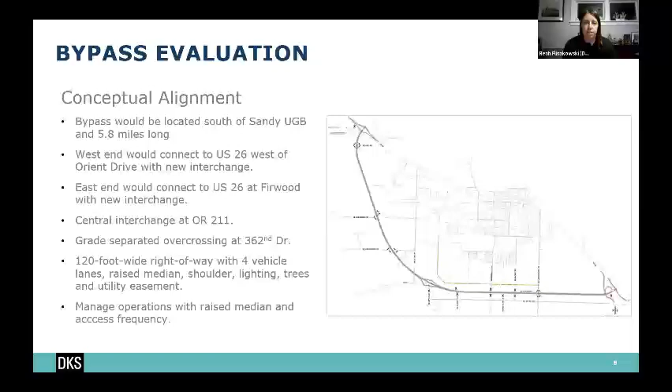And then depending on the spacing, some other roads that would be crossed or overcrossed by the bypass, we would have to close the connections and make sure we have local streets to handle connectivity, so they could get to other facilities that either get you back into town or to some of the right in, right out connections. We'll have the bypass.

Question from the mayor: as a clarification, it sounds like the 362nd will not be able to connect to it. Right now, we're thinking no, it's too close to the 211 overpass, but it would have an overcrossing and could connect to 211, which would bring you back to the interchange. So in a roundabout way, you could get to it pretty easily with 362nd, but it wouldn't have direct access to the bypass.

This is Carl. I see a number of things here, and I realize this is still big picture with lots to be decided, but it looks like there was a philosophy that there wouldn't be very many crossings of the new highway bypass. Is that on purpose? And I noticed everything is going to be right turn onlys, which is a different strategy than currently exists with Highway 26. Is that a new strategy?

Well, the interchanges on each end and in the middle would be full access. I wouldn't say it's a different strategy, but for this type of facility it's recommended to have a raised median to preserve capacity and make sure we're getting the throughput and traffic flow needed. Every time you add a full access intersection, you can significantly degrade operations. We'd have to put traffic signals along the facility if it's not an interchange, because of the volumes.

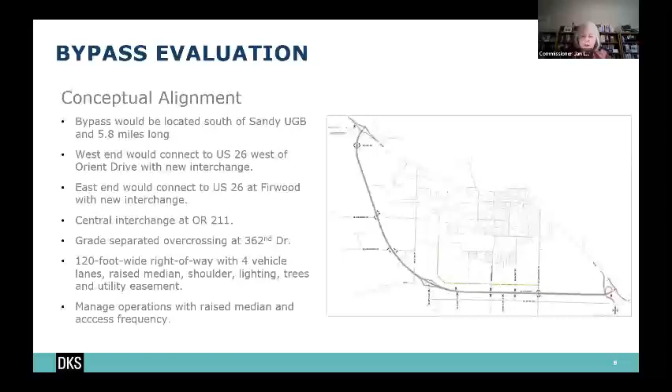All right, let's continue on. Anything else? All right, let me keep going.

So in conjunction with putting together the alignment that I showed, we also took a look at some transportation operations. This is consistent with all of the forecasting and growth, demand, and future volumes we're putting together for the TSP, so they're very consistent. But for the bypass, we are looking at year 2040, and a future peak year that's been adjusted to represent either a summer or winter peak. I know you guys know better than anyone that you have a lot of seasonal fluctuation in your traffic volume demand, especially on the highway.

So we looked at 3 different scenarios in the future. The first was the 2040 no-build. That includes all of the existing transportation system, and if there are any projects we know are fully funded today, that we're very comfortable assuming would be complete by 2040. The 362nd and Bell connection is one of those that's under design now, and we know there's funding in place for that.

Then we jumped to the next scenario, alternative 1. That's again year 2040, but adding any sort of local connection or intersection capacity projects that have been identified, consistent with what's in the 2011 TSP right now. That allows us to compare alternative 1 to the no-build to see what type of improvements we get in intersection performance by building everything reasonable, just short of the bypass. Then alternative 3 is again that 2040 future peak hour, taking all those local improvements in alternative 1 and just adding the bypass. That gives us alternatives to compare, so we can see what type of performance improvements we're seeing just from adding the bypass.

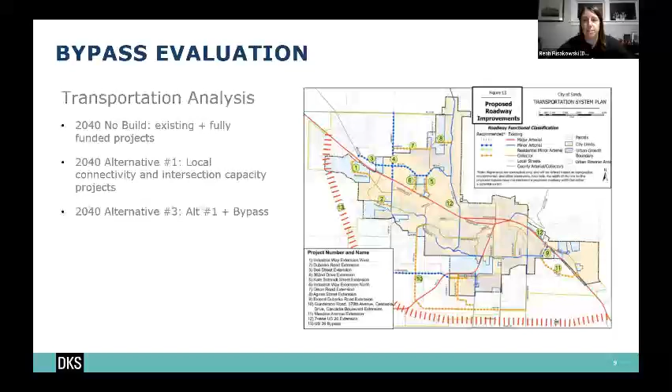That's alternative 1. And then alternative 3 is all of that plus the bypass, and you'll go back to your thing. Yep sure. Okay, so adding the bypass to the other alternative 1 projects, that's alternative 3, right? It is alternative 3, yes. We were just trying to be clear that people knew we were adding the bypass. So basically doing the bypass would give you 4 minutes and 30 seconds savings for people eastbound.

For people that stay on 26, yeah. On the bypass or going eastbound? That would be going eastbound on the existing 26 highway. So you're telling me that going east there's no savings at all, and going west there's only a 4 minute difference? No, it's the opposite, but at least that's what our modeling showed. Again, this is peak hour, but it was a 4.5 minute savings eastbound, and we didn't find any savings westbound.

And this doesn't account for things like traffic problems - we had a truck almost roll over and had a big leak here a few years back, and it stopped traffic for hours. So it doesn't account for any sort of event. It would just be for year 2040, and I did say it's adjusted for seasonal fluctuation, winter or summer conditions, but it wouldn't be related to an event day or something where things are not typical.

But Reah, I guess where I'm confused is that it fails westbound on 26 every Sunday today, and so I have a hard time understanding that people wouldn't take an alternative route. Oh, I'm not saying people aren't taking an alternative route, but when we looked at the travel times between the two, we are finding that people are taking the bypass. About 1,500 cars an hour would divert over to the bypass, and then 2,300 cars would choose to stay on US 26.

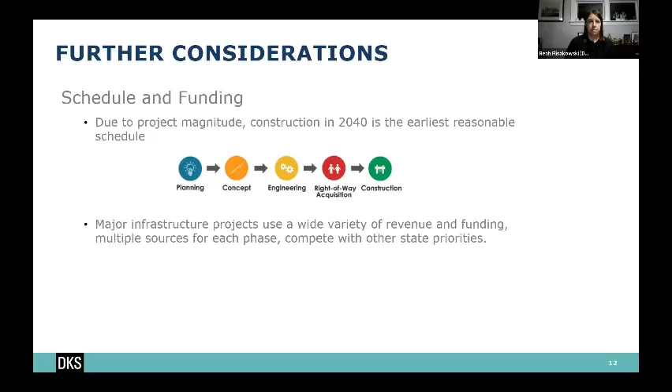The only other thing I was going to say is that I think it would be helpful, no decisions tonight obviously, but for staff to know how budgetarily we would start going down a path as far as the bypass, because I understand your concerns about being like a split in funding, a lot of it coming from the state or feds. But to even do things like the white paper request from Kathleen, which I think was a fantastic idea, we still need a funding source for that. I don't know who would be paying whom. I don't know if DKS would be drawing that up for us and how that would be paid for. But there are going to be costs associated if we want to start taking steps towards this eventual goal. So just trying to get an idea on that. Thank you.

All right, Reah, do you have some more wrapping up to do? No, if you guys are happy, I'm happy. That was a very good discussion. I think we're happy. Thank you so much for the presentation.

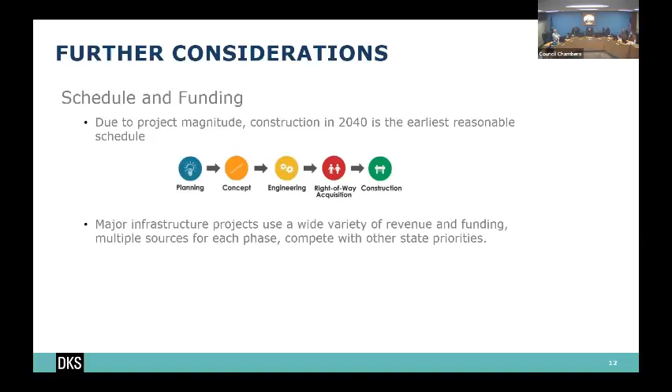So we have a community advisory committee that we're working with. We will have a public open house next year. And then as I had mentioned, we'll also have public hearings.

So with that, I believe we asked 9 questions on the online survey and we had over 400 responses, which I think is amazing. This might be one of the few good things that came out of our pandemic, it's really pushed us to have online public involvement. In the past, if we did it the old fashioned way with an in-person open house, maps out, asking questions, I think we'd be lucky if 40 people came. I've been to open houses where 0 people came. So getting over 400 responses and having this type of input, I think is great.

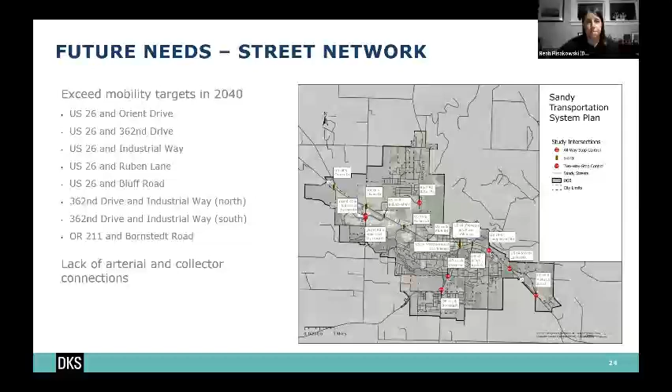Right, any other questions? All right, I will keep going.

So I'm just focused on the street network. This figure shows all the projects, the highs, mediums, and lows, but for space on my slide, I just grabbed the high priority projects. Again, these are all early prioritizations that are up for discussion. I assume they will likely move around, some mediums could jump to high, some highs could jump down, but I wanted to start getting some feedback from this group on these.

So the high priority driving projects are mostly street extensions, and some of them are in design right now, like extending Bell to 362nd. It's two different segments, currently in design and funded, so that's definitely a high priority project. It is in the current TSP.

And then we also have extending Dubarko out to US 26, and it would intersect opposite of Vista Loop on the west end. Again, these are all in the current TSP. We're not promoting or recommending any changes to these.

There's also a very small extension of Village Boulevard out to a collector, right near Cascadia Village Drive. I don't know if you can see it. That's project 21F, in the southern portion of town.

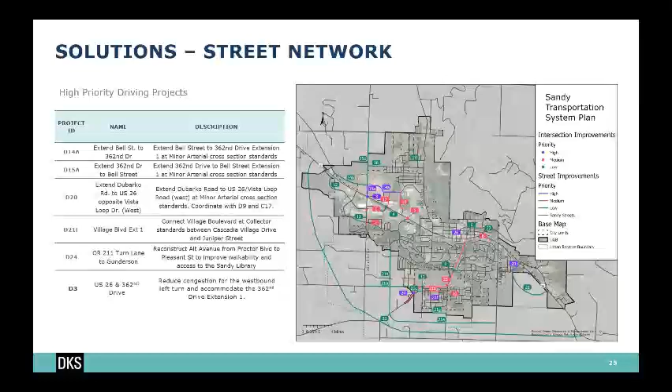Put that on the record. Yeah, is that on the record? We're not doing anything there. Thank you. Well wait, which one don't you like, the name or the description? I love Kelly's giggle there. That was fun. So yeah, the description is a project that we've looked at in the past, and that would be more of a pedestrian improvement, not... Yeah, I would guess so too. Yeah, I was just making a joke, but yeah, sorry. I don't know why that description's in there. That is controversial. Oh sorry, I don't mean to make a mistake on something that's controversial. It's okay, we'll get over it.

Okay, so these are what we have right now for the high priority driving projects. I'll get through all these and then I think we'll have a big discussion at the end, and I can always go back.

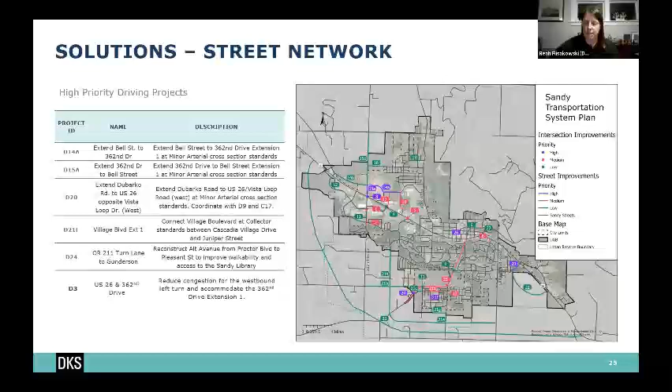So looking at historic collision data, we found that there are a couple of safety deficiencies that popped up. US 26 had some issues at all the traffic signals on the west end: 362nd, Ruben, and Orient Drive. We found that there's quite a few rear end collisions and turning collisions, and typically that's caused by the high traffic volumes we see during congested conditions and just urban traffic driving.

And then we also saw that there are quite a few collisions at Oregon 211 at Dubarko. Those were turning collisions by drivers not yielding.

So for the second one, I think the fix is pretty easy. The current TSP has a project to install a traffic signal at 211 Dubarko, and that should really help with the turning collision and driver not yielding issue that we're having for safety.

And then the other one with the rear ends and some of the turn crashes along that western section of US 26, we were going to recommend installing an adaptive signal control system. And I think Seth had mentioned that recently an adaptive system was added to all the traffic signals through downtown. It's a more modern signal controller that can actually count cars and understand the conditions as they're happening.

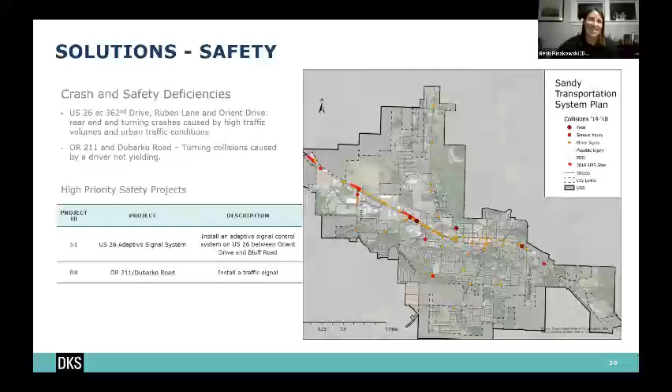So the next slide is looking at potential high priority solutions for walking. These include a lot of sidewalk infill projects and quite a few enhanced pedestrian crossing projects. A lot of the sidewalk infill projects are high priority because of their proximity to specific land uses, like schools or parks, or retail areas where we know there's a lot of need for walking. And a lot of the crossing projects are located downtown, either adding a crossing or updating some crossings, just because of the current conditions not being what they need to be.

C5 all the way through, I think, C15 - those came from safe routes to school plans that were put together for the middle school and the Sandy grade school. We felt like those all are really good candidates to be high priority projects because they are in safe routes to school plans and would be very effective safety improvements for the kids walking in that area.

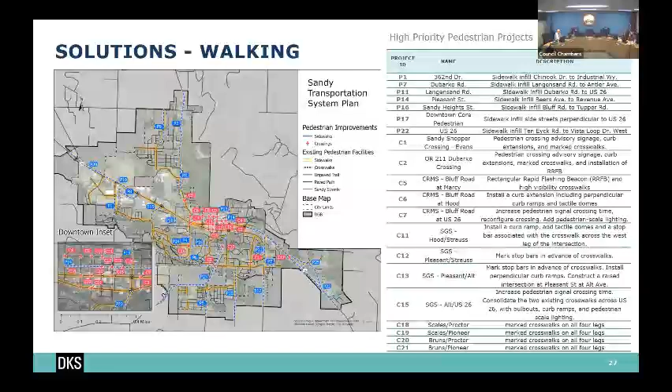I was the one involved a lot with the trails master plan. And the last time we did this, there was kind of this - with the TSP and all that, the 2011 one - there was this question of whose project is it, who's going to pay for it, well it's not in this plan or it is in that. Can you clarify now what the company line is for multimodal trails versus sidewalks? Because with the whole Parks and Trails master plan, we have some off-road trails, some multimodal trails, and some connections we need to make that are obviously sidewalks.

So you're right, it's really hard to split those two apart because they're for people walking and biking, but they are kind of different plans and sometimes different funding sources. So right now, the way we've split them - if it's a sidewalk on a public street, or a crossing on a public street, we have it in the TSP.

If it's a trail within a park, we'll show it for connectivity, making sure we're connecting, but we don't have those as projects. I don't believe we pulled any on-street trails into the TSP as high priority, though I'd have to go back and look. We have quite a few trail projects in our pedestrian project list, but none were high priority, so they're not showing up here. If it's walking or biking and in the public right-of-way, we want it in the TSP. That's where we draw the line. We just want to look at off-street trails to connect to them, but we don't want them as projects since they're not in public right-of-way, they're in parks or other locations.

I know Kelly wants to correct me, but I think that's where we've drawn the line for this. Yeah, I think that sounds correct.

I wanted to let everybody know we've been coordinating, having DKS and ESA, our Parks Master Plan consultant, coordinate. We're going to meet one more time to have them review everything again. It's definitely a coordinated effort, and Tracy Johnson with ESA has made sure to be coordinating with Reah and her folks at DKS, so I want to reassure you that everything's buttoned up and tied together.

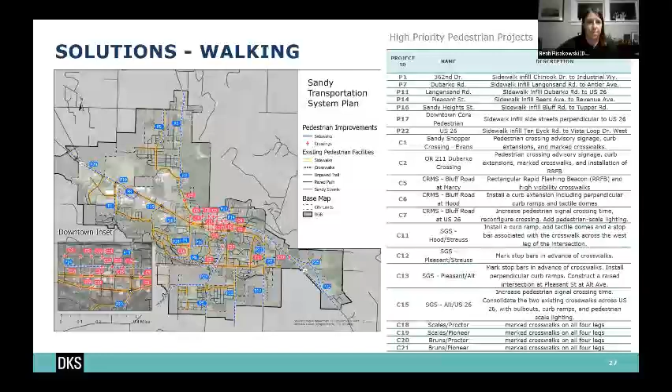So the feedback we'd like from you guys as far as biking and trails is what you think the highest priorities are. Can I add something to that too, Reah?

One thing we'd like feedback on too is if we end up updating our SDC methodology for parks and trails, which I assume we'll look at in 2022, and potentially for transportation as well, what kind of split we'd be looking at for some of these projects. There are certain projects that could get funding from both parks SDCs and transportation SDCs, but we'd need to decide on the split and what projects would qualify for that, I guess is how I'd summarize it.

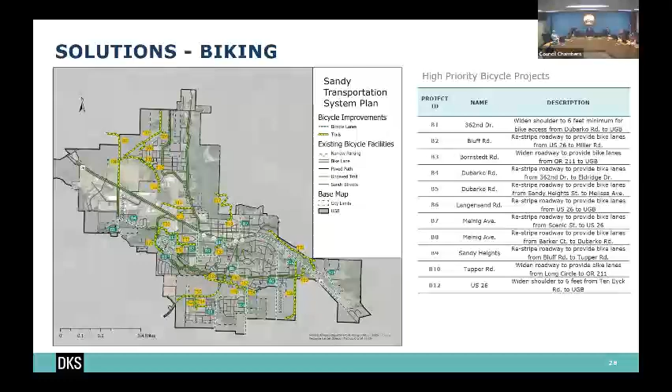Okay, for bikes. So just to clarify, is the intent that maybe the first step is getting a gravel trail in, and then eventually it becomes paved, like a multi-step construction process? If funding is an issue or something, we may start off with packed gravel, and then you've got the option - once you get another grant, you can go ahead and pave them. Okay, that makes sense.

Is that it? Oh, I had one other thing on the trails and stuff. A real important, critical thing Jeremy brought up is this whole connectivity, for example the Tickle Creek Trail and crossing 211 and 362nd.

One of the things we were hoping to do there was a win-win type project. There are culverts at those locations that aren't really fish friendly, so there's an opportunity, it's a fairly big project, but we've done it in other places along the Springwater, where you put in a fish friendly fish passage and at the same time create a trail along the creek, so people can go under the road along the creek rather than trying to do something over or on the road.

So in the Parks and Trails master plan, there are a couple of possible under-the-road passages along the creek. Combining it with fish projects makes sense, since there's always millions of dollars for fish projects.

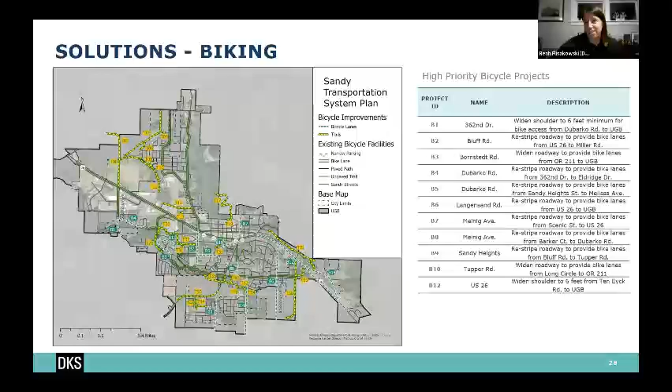All right, I think we can move ahead. I have to say, for a group that was silent for 30 seconds when we started talking about bikes, that turned into a very good discussion. We tend to surprise people. You were quiet and then all of a sudden everybody had lots of opinions about bikes. That's good. All right, let's keep moving.

Solutions for transit. I'll admit this is directly from your brand new transit master plan, but we want to make sure we're incorporating those recommendations and projects into the TSP as well. Most of their projects are related to service improvements, there are quite a few routes they're looking at adding. Some are more operational, like adding a bus and a driver, and some are about coordinating with TriMet and other agencies.

I don't know if you guys had any questions on transit. I guess it's kind of a different mode for us since you just redid your master plan, so we're mostly just trying to tie it in and reflect what that plan is recommending, making sure it ties in with any other walking, biking, or driving improvements, so it's all coordinated.

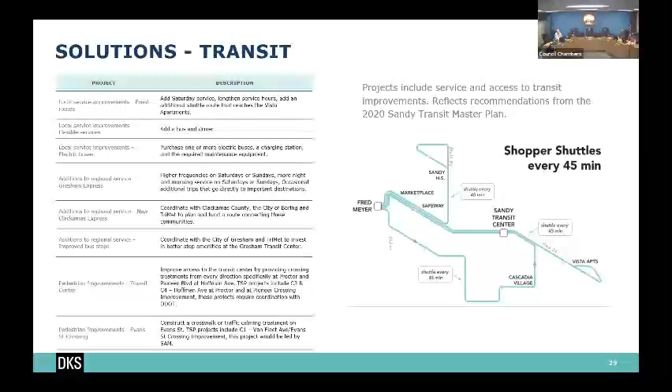Okay, so we've gone through all of that. Now we got to talk a little bit about money and finance.

With Mike's help, we took a deep dive into the historical transportation revenue, to see how much you guys have been collecting and what you've been spending money on. We took those past averages, worked with Mike to make sure they're realistic, and extrapolated them out to the year 2040, so we can get an idea of what we really think is going to be available the next 20 years to spend on the transportation system and the projects in this plan.

So this is where it starts getting tough. Based on that forecast, different projects have different costs, but right now it's about a third of the high priority projects we looked at tonight that can make that list.

So I'd like a little bit of feedback from you guys, what type of priorities and projects should we be looking at for the next 20 years? Are there some must-haves? Looking back at everything we have, are the crossing projects downtown or by the schools kind of the most important? Or is it more some safety projects? Or is it all of the motor vehicle capacity projects? If we have to make them all compete, I'm curious what your guys' input would be on that.